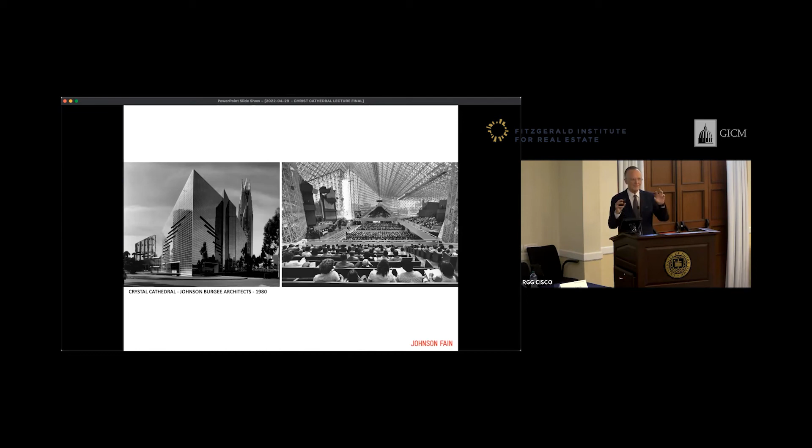The building as we found it was actually a kind of monumental building. It opened in 1980 and began to provide service to Reverend Robert Schuller, who had hired Philip Johnson and John Burgee of Johnson Burgee to design it. Spoiler alert, I was actually a very young architect apprentice in my 20s, and I worked in that office in New York City at about the time this was done. So I had a mouse's view through the wall about what was going on, and I worked on various parts of it for a while.

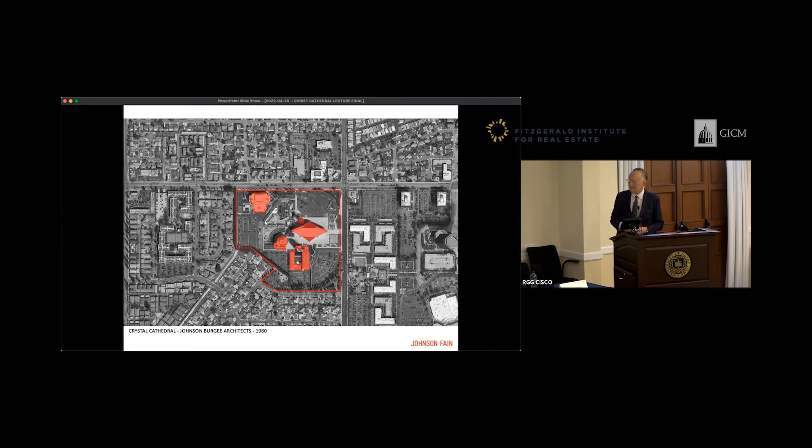This is the site. It's 20 acres. The diamond you see in the middle is a plan view of the building. There are a lot of interesting buildings around it, all shown in red. The one on the bottom was the first building Reverend Schuller built, called the Arboretum, by a well-known architect. Then next to that, the little round piece is another building. And up in the far left corner are the pastoral offices and a school. It's about 20 acres total.

Those other buildings that preceded us and are around the cathedral — one of them is called the Arboretum, and it was designed by Richard Neutra, a rather famous mid-century modern architect, if you're familiar with West Coast architecture. This was the Arboretum, and you'll notice Reverend Schuller there — on the one hand, he's got his congregation inside delivering a sermon, and on the other hand there are folks outside. I'll explain why: there's a very fine barrier between inside and outside in Southern California because of the fantastic weather, and he actually started by giving sermons outside.

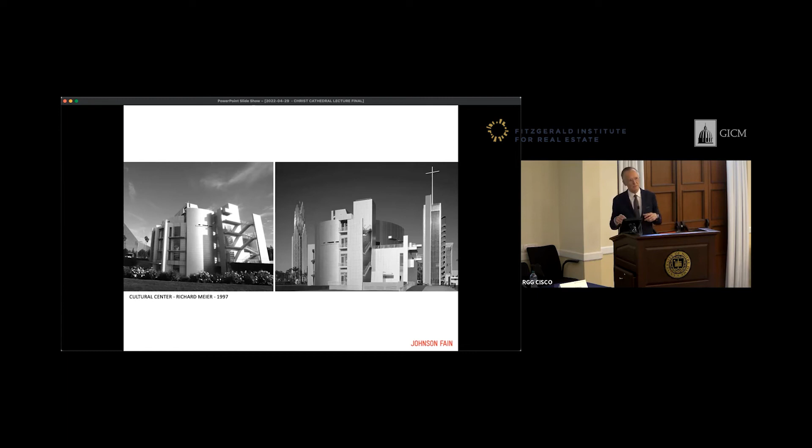So he continued that tradition in his buildings. He also later, in the 60s, built a tower — a very tall tower. On the top floor is a chapel, very beautiful, overlooking the site. Then in the 90s, Richard Meier, the well-known New York architect, was working on the Getty, a large museum and cultural center in West Los Angeles, and while there he was retained to do the cultural center that sits next to the cathedral.

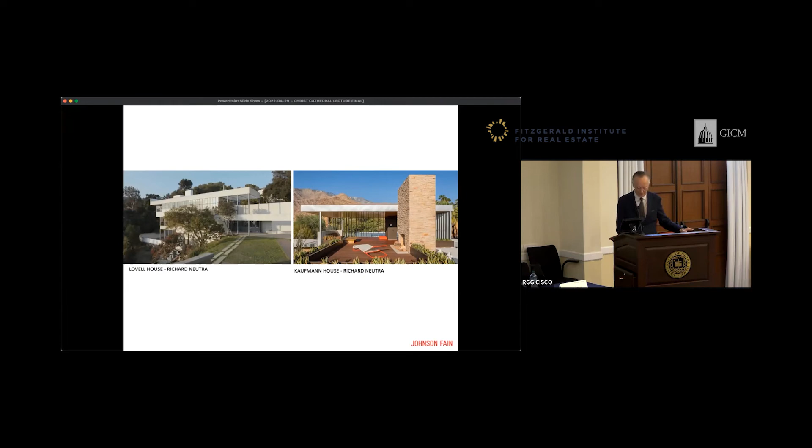Now we look at it today and it looks pretty simple — it's a box, glass on all sides, floor to ceiling — but it's become an icon and a landmark that you can visit.

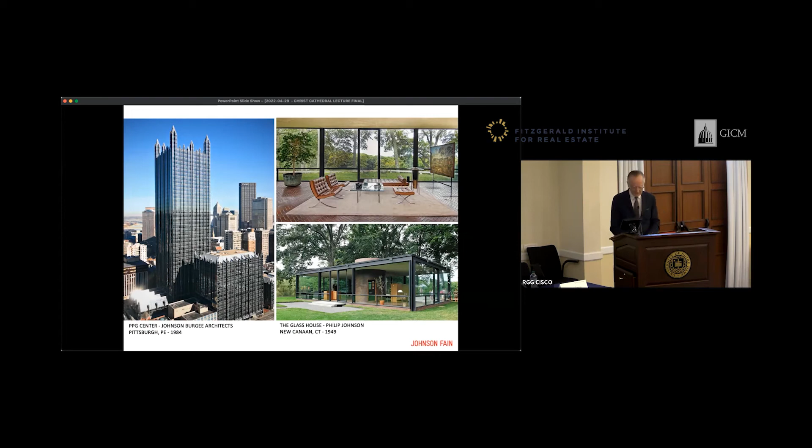On the left is a building from the mid-'80s that was the headquarters for PPG, Pittsburgh Plate Glass Company, the largest provider of glass for buildings in America. He did that headquarters as well, and so he had a lot of experience designing with glass.

I want to point out this building, a very small outbuilding on his site in New Canaan, where the glass house is—this was Philip Johnson's estate. It's a small building made of two triangles in plan that sit together and then slide slightly, with sloping ceilings that have a ridge, and the ceilings are glass. You can see on the inside and outside, the ceilings are all glass.

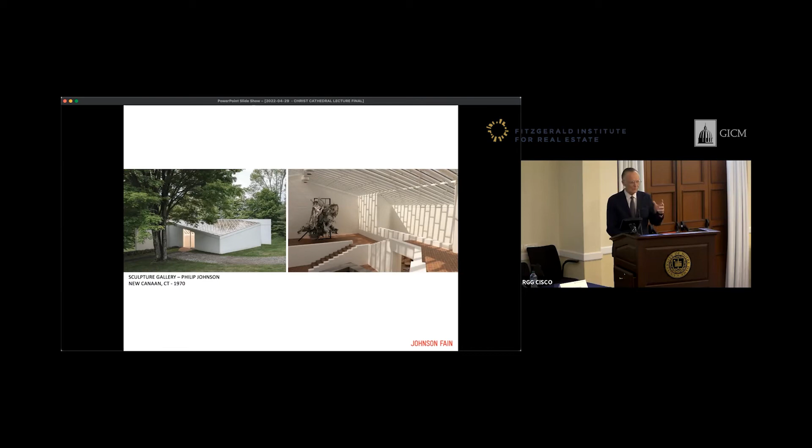Well, you're going to see something similar in Crystal Cathedral, and then something more. Because I was in the office and familiar with what they were all doing, and then 30 years passed and I was brought back, maybe I had a unique kind of passenger seat.

Now I'm reminded—I want to paraphrase something Tolstoy said about families, how in some ways they're all the same, in some ways totally different. That would be true maybe of communities and cultures and regions as well. We're all the same, of course, and yet how we manifest that is quite different.

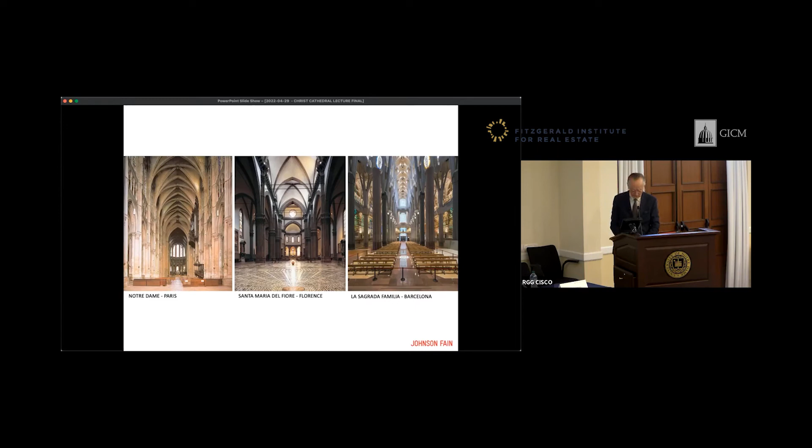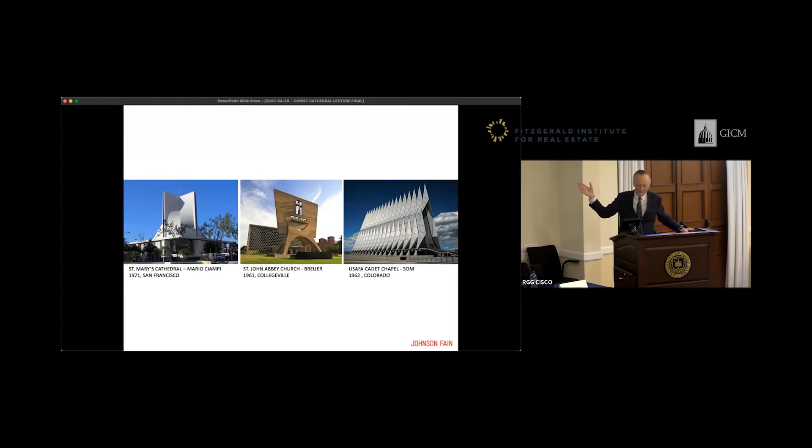Having said that, through the mid-century, the late mid-century, there have been a lot of modern Catholic buildings as well. In the city I grew up in, San Francisco, St. Mary's Cathedral out on Geary is there, and it's actually a central cruciform plan, not a processional basilican plan. These are a few of the others that were done in more of a modern language.

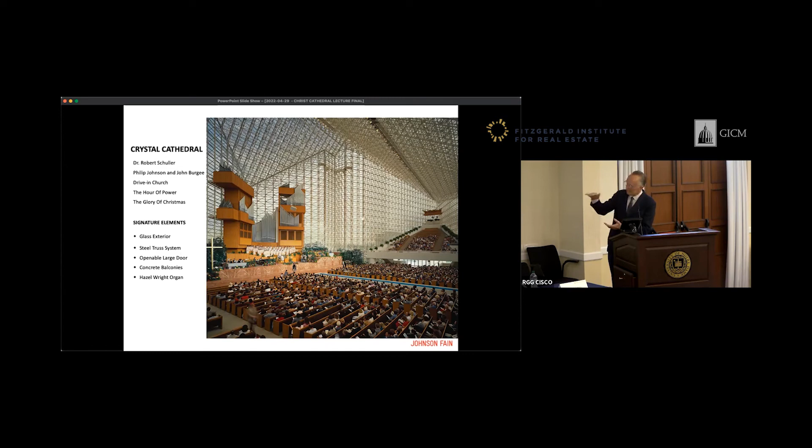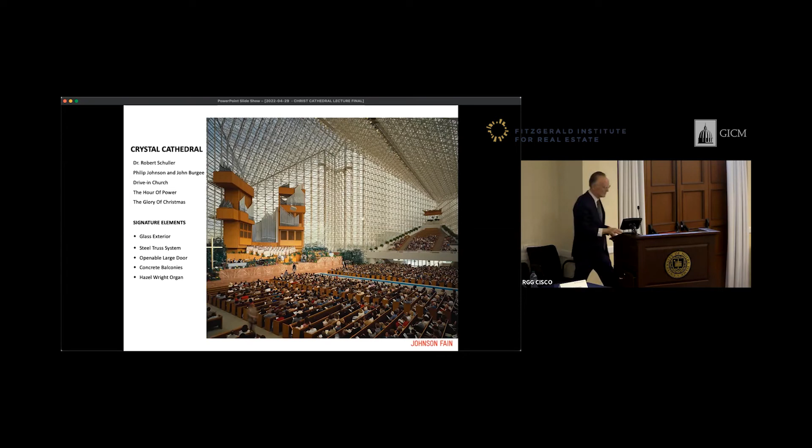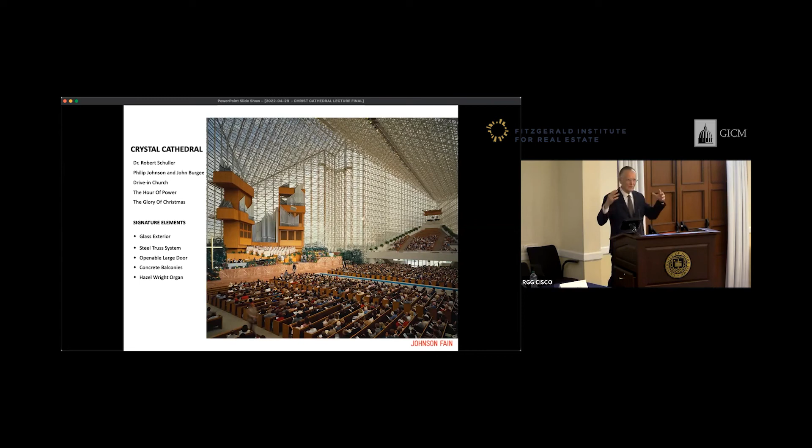There's actually a 90-foot tall door right there. You see the hinges at the top, and that's because Reverend Schuller wanted a 90-foot tall door that would open up, and he could turn around from the pulpit and address the people in the cars. So that thing that began his career, he brought through several iterations, even to this building.

So that's what we had when we arrived, and when we were asked to present, we looked at three different ideas. One was more or less the Basilica processional idea. You're seeing the plan there, the diamond. The diamond is stretched long in the east-west direction and is compact in the north-south direction. The beautiful thing about it is that it's perfectly cardinal oriented.

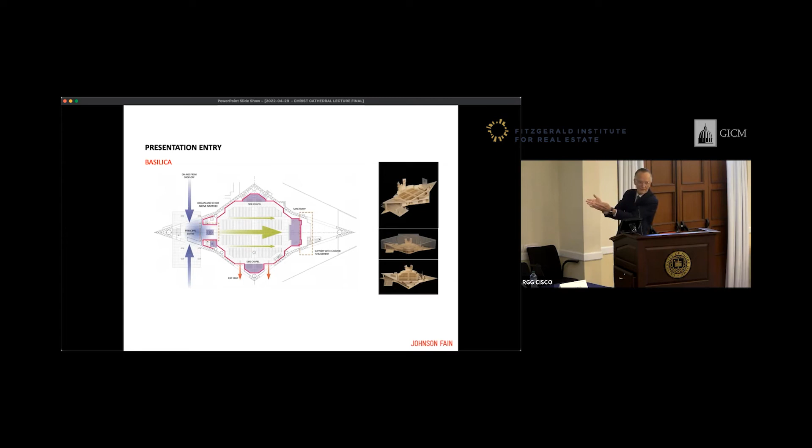The sun comes up in the east and sets in the west. The north is without sunlight. The south, arguably the narthex, the main entry, comes in from the south where the sun is. So there's a lot of nice natural features to the position and shape of the building, but the only way one could get a long processional, a long basilica approach, was to come in on one side and come sideways through the building. So we looked at it, and we weren't crazy about that as an idea.

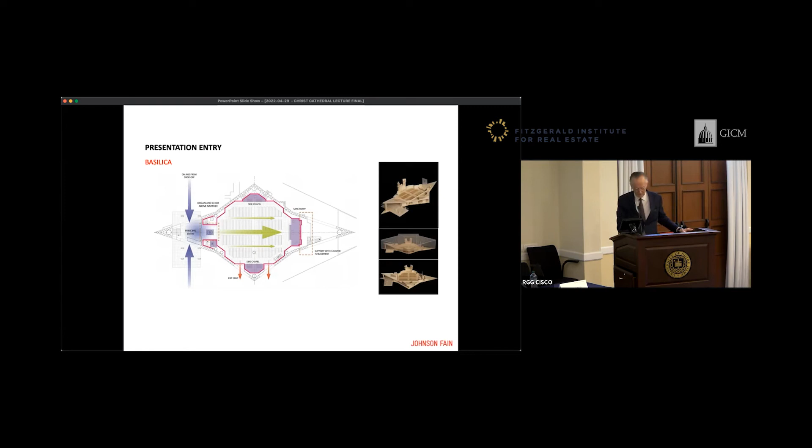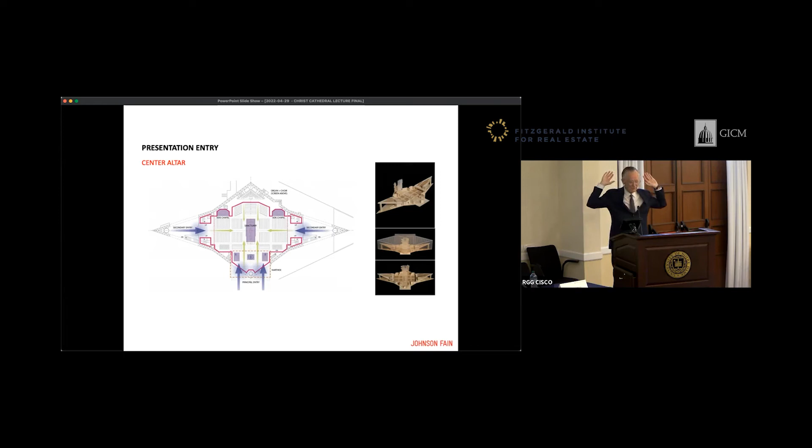There was a lot of talk when we were beginning about whether it could be a central altar location. The purple is the predella, the elevated plinth, and the altar in this case is right in the center. We were allowing entry on three sides. That would put the altar in the middle, and some people would have a frontal view, some a side view, some a rear view of the clergy performing the service at the altar. But there was a lot of interest in the building committee and among some of the priests for this.

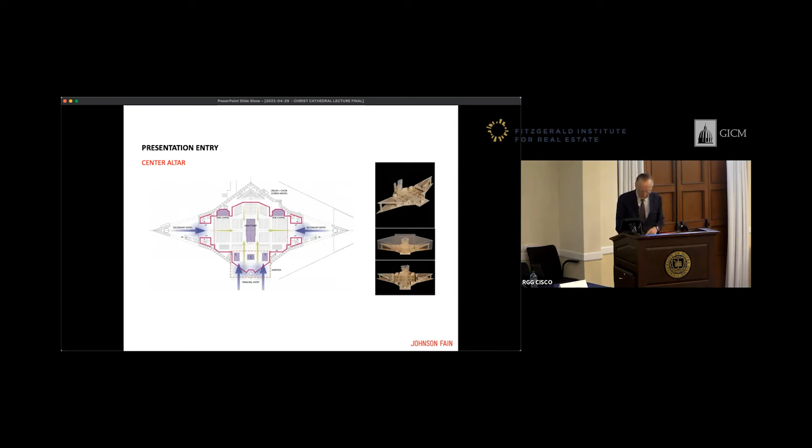And the last of three schemes that we looked at was what we called again the processional. We just left the building as it was, came in off the bottom, off the south, and then pushed the altar all the way to the north.

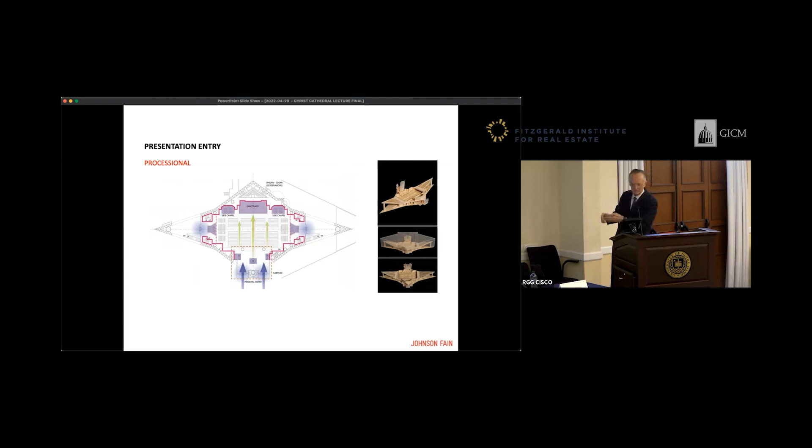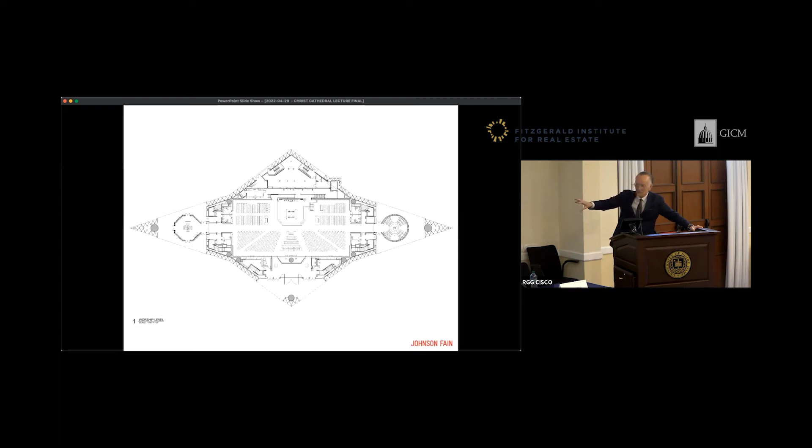It's the short axis, but it's still allowed for a processional. What we ended up with, in looking at that and talking over many weeks with everyone, was kind of a compromise. So you can see there's circulation left and right, but it dead ends. The primary entrance is on the south, which is what the building was intended to be, to come in.

We defined the floor, the ground floor of the sanctuary, as a perfect rectangle, and we pushed the predella and altar just slightly to the north of center. So you could still enter from the plaza, proceed up and in to the predella and to the altar. Then the bishop's chair and the ambo, or the lectern, were pushed back against the wall. On the far left is the baptistry.

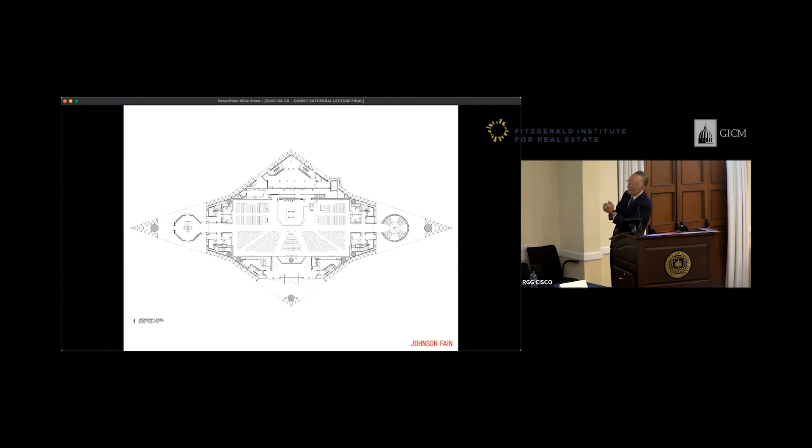So it's not really an entry, it's a baptistry space. It's enclosed. And on the right is the chapel of the Blessed Sacrament, with a circle. Again, that's not entered from outside. So that slid into what were formerly entrances into the building.

The other thing about it, this is the mezzanine. So you have the 3 sloping mezzanines, and the organ, which would be at the top, right up here. This is the primary organ. It's called the Hazel Wright organ, and it was built in Italy and restored during our time, over 2 years, in Italy. And the pipes are there. There are also some down here.

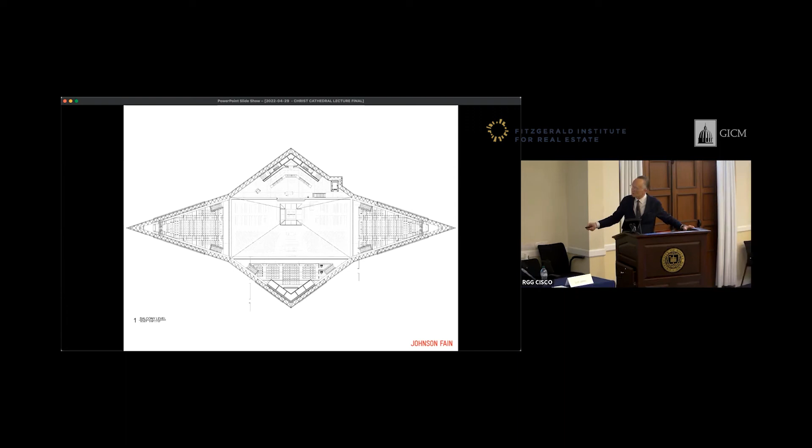The organ console moves around. Sometimes it's here, sometimes it's there. And there are also pipes on the ends here to bring sound from all directions.

These are sections through the building, just to give you an idea of the relative scale. If I tell you that this right here varies, that's the lower register, that's where we would be on the ground floor of the sanctuary, that's between 14 and 18 feet. Then you can see how tall the building is. It's quite remarkable for its height. It's 120 feet up to the top.

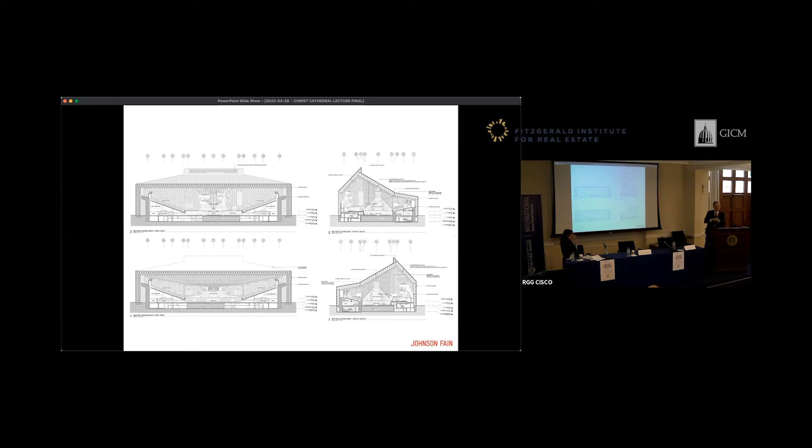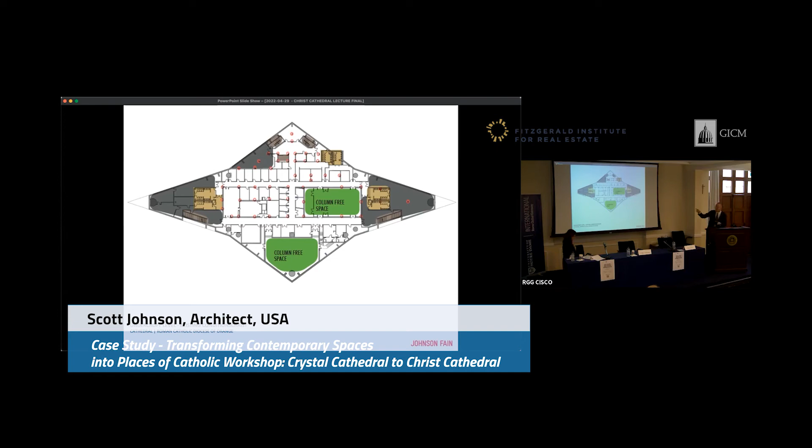Underneath the entry level, which is all at grade, there's a basement floor or an undercroft. A lot of things happen there: sacristies, prep spaces, wedding, family rooms, vesting. But there are 2 spaces in particular that are column free. The one at the bottom is column free, and then the 2 in green.

What that allows us to do is have a music rehearsal room in the bottom, where choir, instrumentation, all that can practice. The orange up above, which we haven't done yet, we're about to embark on, will be the chapel of St. Callistus, a smaller sanctuary for about 250 people for services. The main floor services about 2,000, so the scale is quite different.

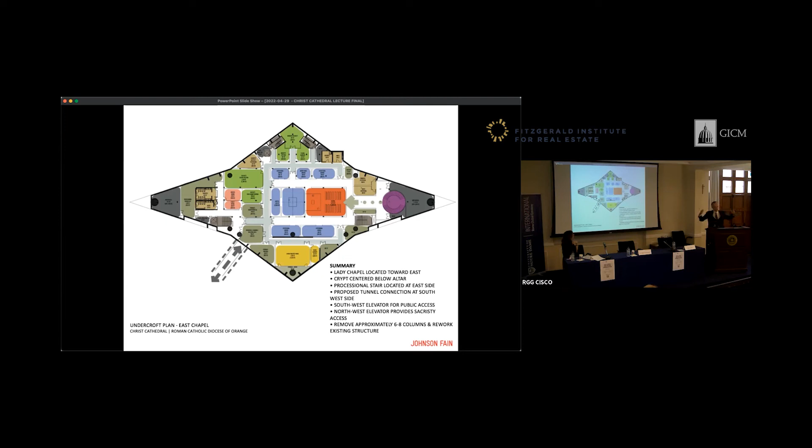There were a series of technical problems we encountered here that, when everything was microphoned and broadcast and sent out, weren't problems. But when that wasn't a priority, in the case of the Catholic mission, it had to work for everybody that was in the building experiencing the Mass. Acoustics was one of the big problems. The space was so big, and it was all glass, so it was so reverberative.

The reverberation time, which is to say, if I say hello, when hello comes back to me, it's 4 seconds later. If you're doing Gregorian chants, maybe that's good, right? No one cares, no one notices. But if you're doing a spoken word, I would just be a mumble of sound to all of you, or the first time you heard me was 4 seconds, or you heard me in 1 second, and then you heard me again 4 seconds later, what I just said to you. So there was a lot of reverberation issues there.

So we knew, in what we did to the building, we had to be able to fix that, so it was good for music and also good for the spoken word, which requires a very tight reverberation period. One of the things we did in that bottom 14 to 18 feet, what you see there, is a series of faceted limestone walls.

These are kind of boring drawings that only an architect could love, but I show them to you so you can see the large scale plan sections we developed, these chunks of limestone, vertical, in different orientations. There were three, and we randomly mixed them all the way around the bottom so that when sound came out from wherever, it would have multiple reflectivities. It would diffuse sound back to the listeners sitting in those seats. So there's an importance of being able to do that.

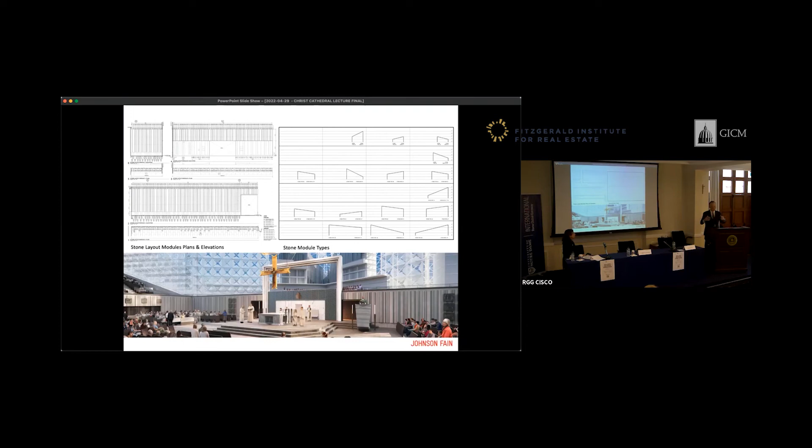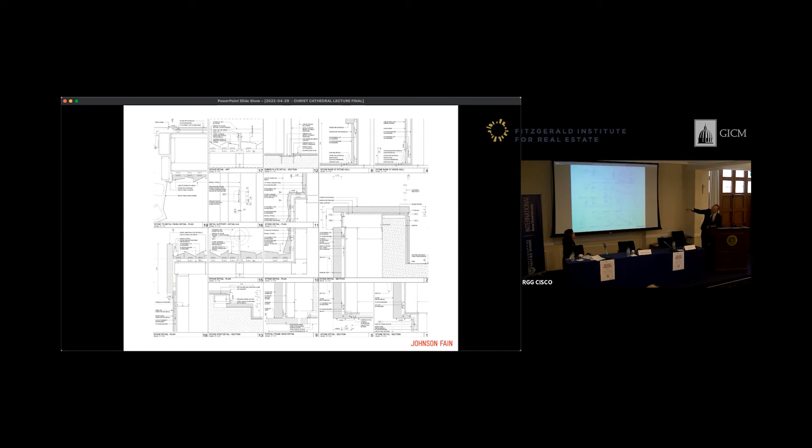You see the elevations in the upper left, more architectural type drawings, but in the middle left there's another plan showing how those facets all work to disperse the sound and clarify it to the listener.

The other part we were interested in, I'd like to say too, is that metaphorically as architects we thought the stone in that bottom was like the earth — that if somehow, explicitly or implicitly, you sat there, you felt you were enveloped in the earth, and that's the bottom 18 feet. But the 100 feet above, this dramatic height, was more about the heavens and things above the earth. We were trying to create a tangible sense of that through the way we used materials in the building.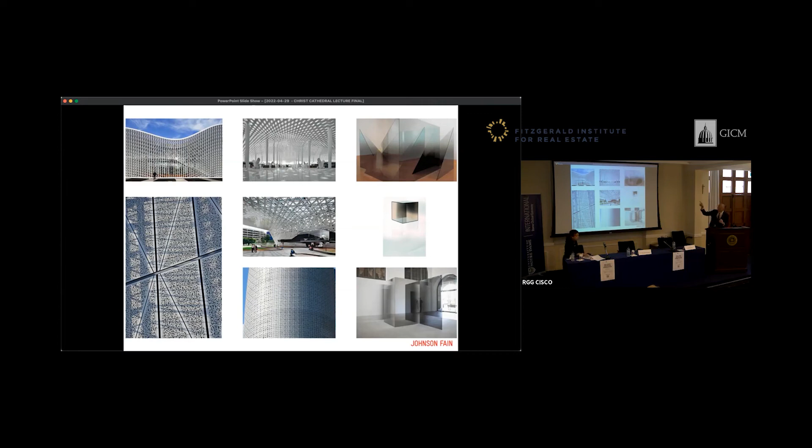So we were interested in the space frame and what it does for light and faceting the light. We were interested in even an artist's treatment of glass and what that would do. So we created a digital model of the inside of the cathedral — this is just an architect's drawing of that 3D model.

The space frame was made up of squares in plan, and those squares we cut into four triangles — on the lower left you see those triangles. We had four different types: in case 1, the triangles were all closed and flat, so they would reflect back all the sound that hit them. In other cases they'd be open 15 degrees, 30 degrees, and 45 degrees, like a blossom that would be more open or more closed.

We distributed them through 6,000 squares on the ceiling and walls, arranging them in a way to try to eliminate glare. When you're sitting or standing and looking laterally, like to the east or west, the sun is low — at sunrise or sunset — and that's when you get direct light into your eyes and high glare. Once it gets higher, you tend not to look that way as much, so you don't really get glare looking straight up; as a practical matter, you get it lower down. So you can see there are more open, more yellow facets down in the lower zone and less so in the upper zone. That's how we distributed the 6,000 petals, or quatrefoils, as we called them.

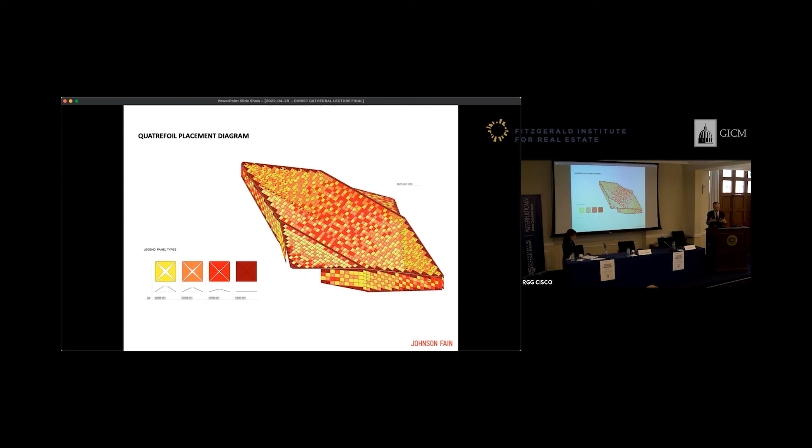A quatrefoil is a sort of fancy name that actually comes from a Gothic vault — you may have heard of it. In a vault you have a groin and four quatrefoils, and we used that word for our own purpose. They were made up of perforated white metal so that some of the sound that hit them reverberated back into the space.

But through the holes, there was an acoustical absorptive material. So some portion of that sound went in and was absorbed. And behind that was a clear plastic layer that would allow the panels, when the sun was up there, to be translucent—not completely opaque nor completely transparent, but translucent enough to create an ambient light.

So those quatrefoils are kind of like my glasses. I can't see without them, but there's a lot of things going on in the way these lenses are engineered, right? And those quatrefoils were, in a way, doing all that work.

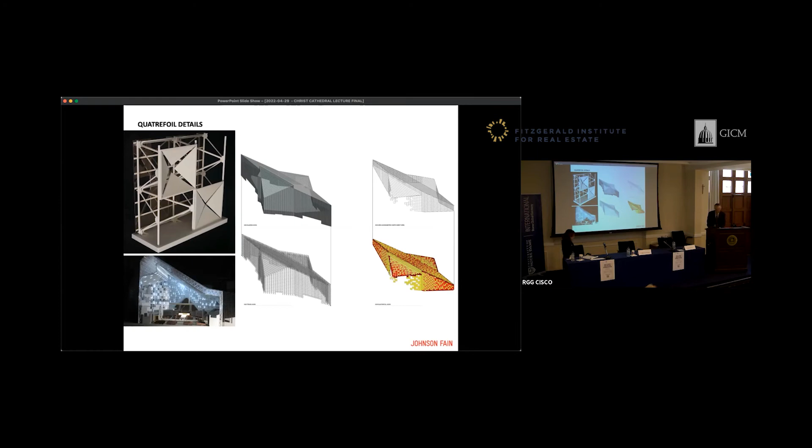And then we built models of it. That model shows you one that's maybe open 15 and 30 degrees. We did digital studies to see how they would work, and then we did digital studies of the light and the glare.

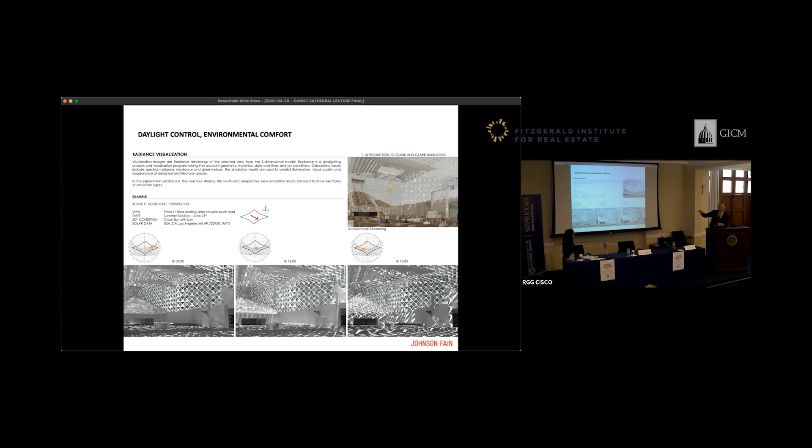And these are studies at summer solstice at 9 o'clock, noon, and 3 o'clock, just to see how the light patterns would work.

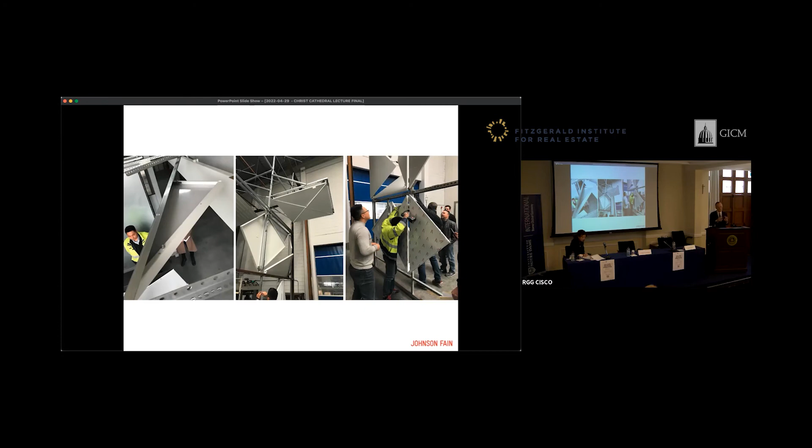And then we actually had the vendor build them so we could look at them. Now, these don't have those complicated quatrefoils I just described—you're just looking at the panelization, the attachments, and all of that. These were all worked out here in Southern California, and then built and shipped from Germany. We had a German vendor who machined all of that and sent it to us, and then we installed it.

The other part, which is kind of interesting—I don't know if it's amusing, but it's an interesting picture—gives you insight into the challenges of an idea that on one hand is so simple, on the other hand, it's like scratching your right ear with your left hand, right?

Or vice versa. If you look at this drawing, we basically had to scaffold the entire interior if we were going to put 6,000 quatrefoils on the inside, controlling the acoustics, controlling the light, creating something for light to bounce back at night. Remember, clear glass in particular doesn't reflect back.

It's transparent. So if at night you have a glass building and you throw a light up there, it doesn't bounce back and give you light—it just passes through to the outer atmosphere. So you have a night problem. You have to still figure out how to light at night, because the light all escapes the building.

So these quatrefoils are doing, like I say, my glasses do—a bunch of things without which I can't see. So if you look here during the construction, if you wanted to go up in there, you'd start down here, go up, get over the mezzanine, and then start climbing and climbing.

And then there were horizontal trays—if you were going to install on a vertical surface, as a workman you'd work on those horizontal trays to build them into the space frame. And once you got to the top, they had to put a deck over the whole top so they could get the top as well.

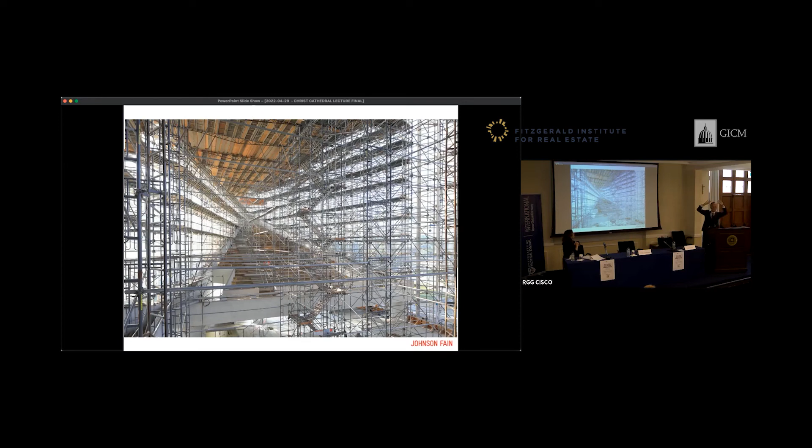So that experience was kind of like this. For many months, workers every morning went up, took their lunch, went up there and worked all day, putting these quatrefoils into the frames.

And what this gentleman is doing here, or down there—they're up on the scaffolding. These guys are on the side scaffolding, placing, engineering, and putting all this stuff in. It arrived from Germany and they're installing it. So it's an enormous effort.

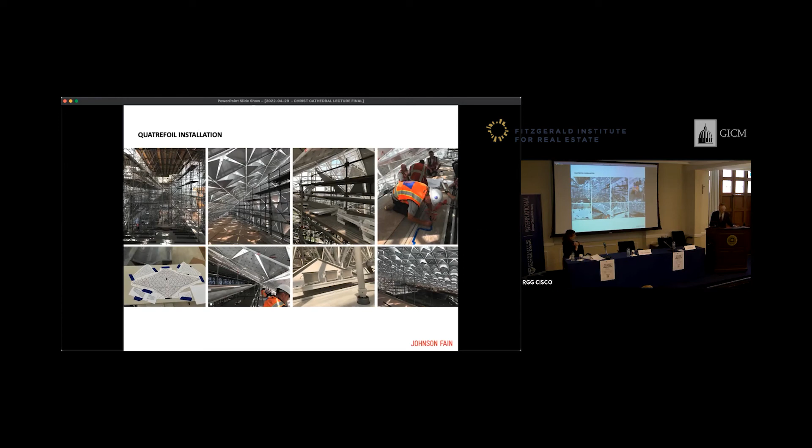But it's building a new lining inside the old.

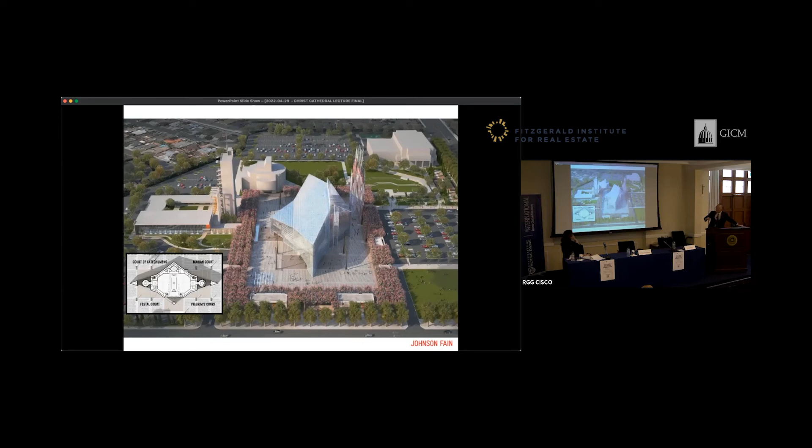This is just a reminder of the site plan—an aerial rendering done early on. In the beginning, we were working with landscape architects to be sure that the plaza in which the cathedral sat was appropriate for the building, along with the shade structure so things were comfortable, the plantings around, and ancillary buildings. Each quadrant of the plaza had a different purpose.

And this is the building as it was done. Now, there are a whole bunch of details I won't go into, except that at the time this was done in 1980, our seismic codes in California were fairly simple.

So Johnson and Burgee were able to get all these glass panels put onto the building essentially with glue, meaning they weren't held positively captured—what we like to call 'with frames.' They just had very high-powered glue. It wasn't Elmer's glue, but it was glue. And they attached it, and all was good.

They'd had 5 or 6 little fractures, but no major seismic activity, which created a problem. Since that time, Southern California is on a major earthquake fault. We've had some activity, and those aren't the codes anymore. The codes always get improved and elevated, and every year there's more you have to do.

So we had to go back and fix the few lights that were not adequate, but we had to redesign all the caps so you positively held those glass panels, so if they broke they would stay in the frame. There was a process of about a year doing the outside.

We didn't really want to change the exterior, because over the years many people come from all over the world to see the building and consider it important, whether you're an architectural devotee, a Christian, or now a Catholic. We wanted the building to keep the sense it always had, so we minimally impacted the exterior and reworked the interior in a big way for the Catholic liturgy and service.

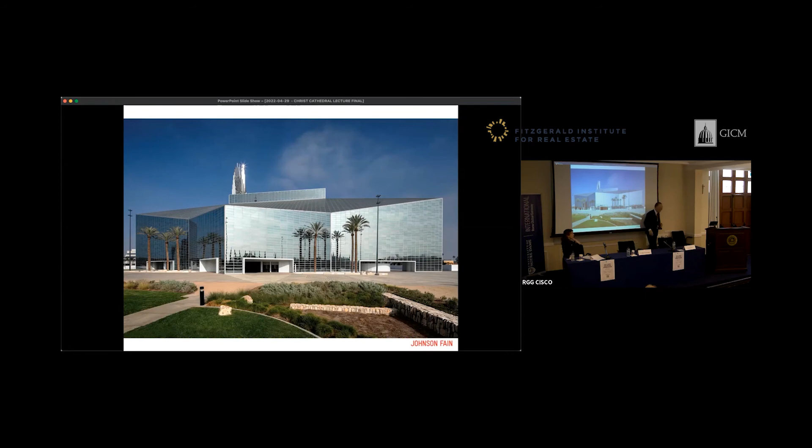This is the Blessed Sacrament Chapel, and on that end is the baptistry. This right here is the main entry, or Bishop's Door, from the south, facing the plaza. So we really didn't change any more than we had to.

You're beginning to see what happens with glass at night. Southern California has a lot of clear days and clear nights - right now we have a few too many, actually, trying to solve that problem. Now we not only have bounce light back into the cathedral for evening services, but it's also a draw - it's kind of luminescent, and you see it as you're in the townscape.

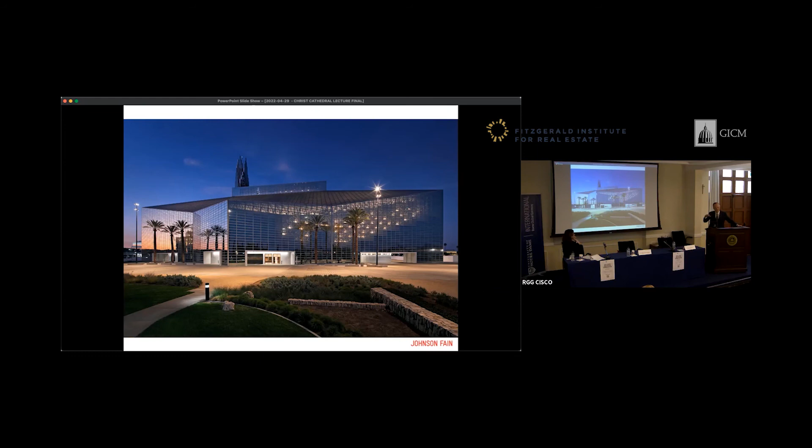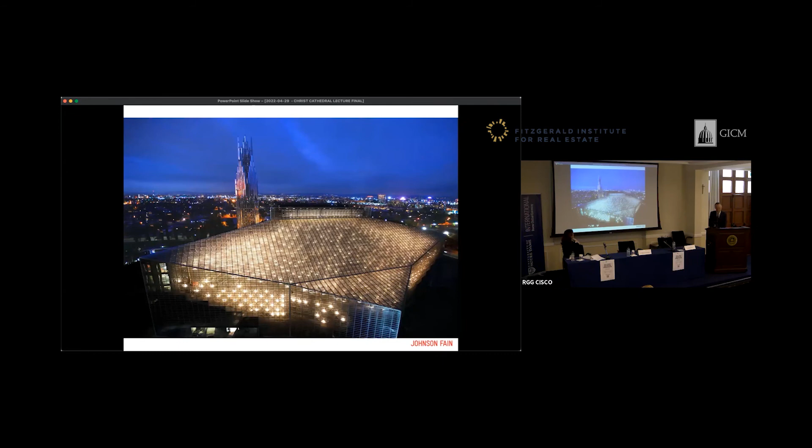This is also a very low-rise community of commercial strips and single-family houses, so its height makes it visible from a couple miles in every direction. By night, you can see it again - it's quite strong, and none of this was the case before the quatrefoils were put in.